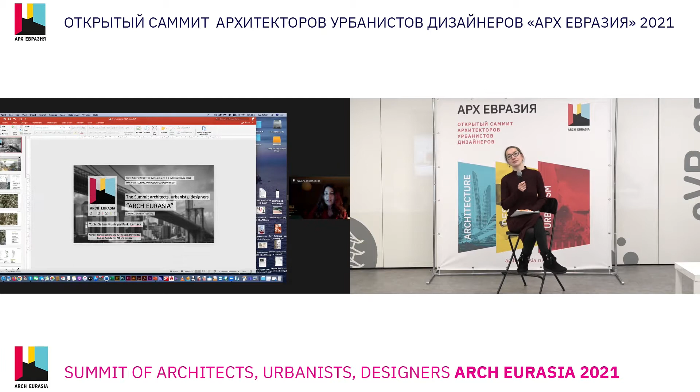Yes, we are from Athens. My name is Panita Karamanea, Thanasis Polyzoidis. We are architects and landscape architects, and our group is called Topio Efta. It's called Landscape 7 in Greek. We want to present a project of ours that won an award in an architectural competition in Cyprus.

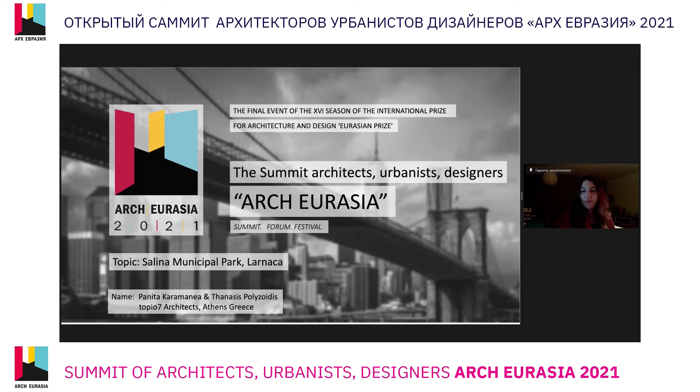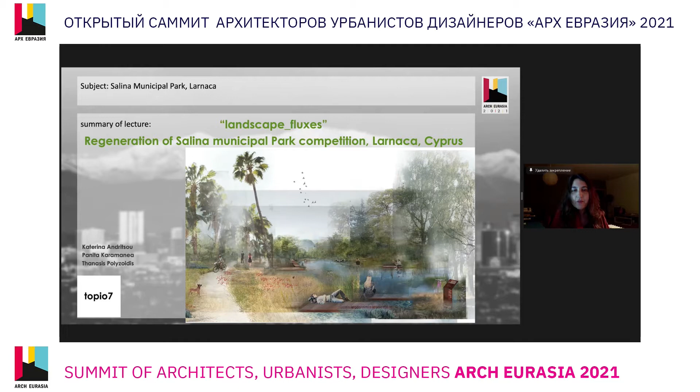That's called the Salina Municipal Park. The project is called Landscape Fluxes. It's a regeneration of Salina Municipal Park, a competition in Larnaca, Cyprus.

Here we want to first present a little bit the topic and the site. It's Larnaca, a city in Cyprus. You see with the red rectangular the place where the park is. The general layout of the center of the city is a typical Mediterranean city, very dense, with not a lot of public spaces and not a lot of greenery. The municipal park is right in the middle of the center, crossed by central roads and avenues.

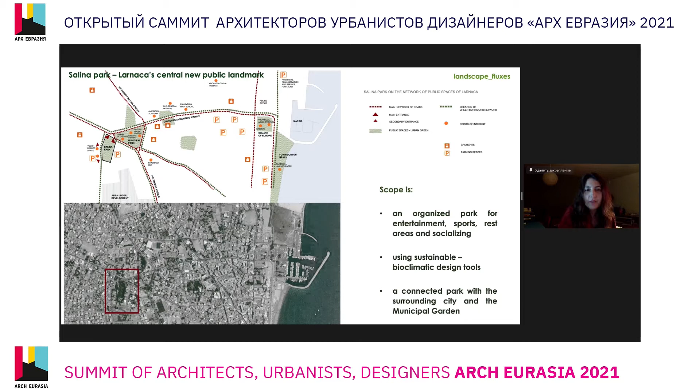It's nearby a centrality that has the municipal library, another park, and is pretty close to the waterfront. So the scope of the competition was to design an organized park for entertainment, sports, rest areas, and socializing, using sustainable bioclimatic design tools, and create at the end a connected park with the surrounding city and the municipal garden, which is right next to it.

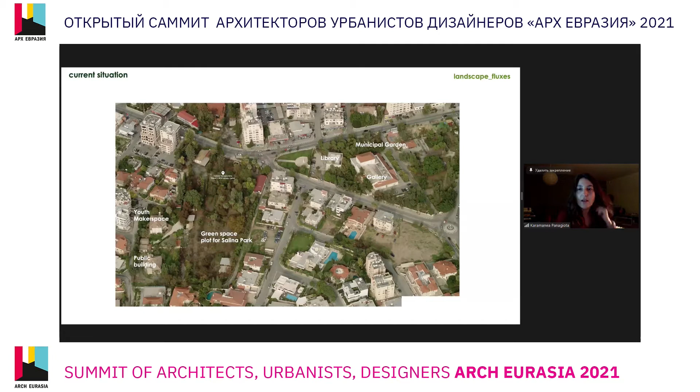Here we have some aerial photos that show how the nearby neighborhood is, and this urban void, let's say, with a lot of greenery inside, but it is a rather neglected and disconnected area for the city. It's not very usually being used, people don't frequent there, so it's a pity and a lost value, and it's a challenge to try to incorporate it into the urban net.

And offer a great public space with greenery and various uses for the citizens. So the main objectives of our project were to create a pole of attraction for local and supra-local uses in the framework of a holistic landscape eco-strategy in order to achieve an open and accessible public space with social dimension.

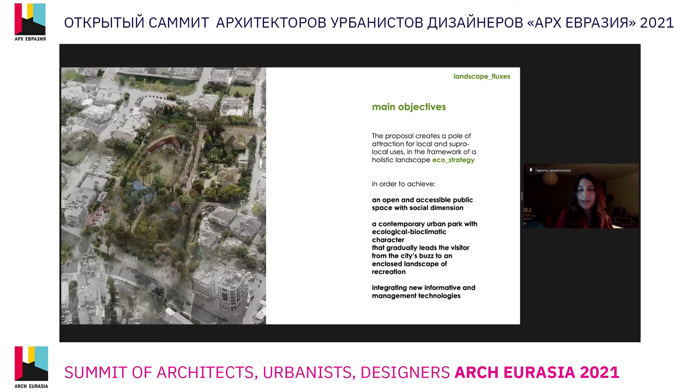A contemporary urban park with an ecological bioclimatic character that gradually leads the visitor from the city's buzz to an enclosed landscape of recreation, to an introverted internal greenery core, integrating at the same time new informative and management technologies in order to have a smart park as well.

So the main idea is to create an area of mutual osmosis with the city fabric, a well-organized area of urban nature between the park and the city, a field of landscape fluxes that will form a dynamic new landscape of a permeable green buffer zone that leads to an inner introverted clearing of greenery, of urbanity.

Where you can experience the periodicity of nature and a series of urban uses.

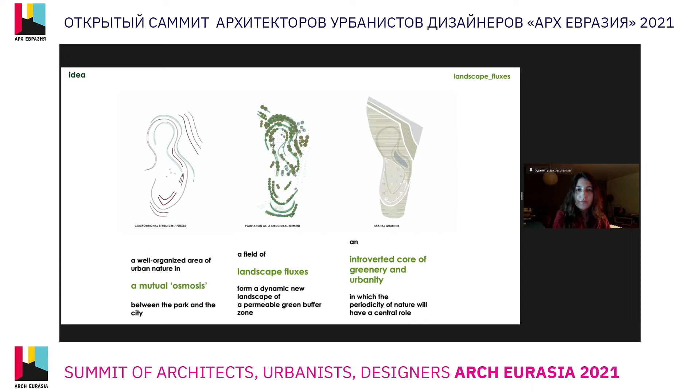It's very important to re-establish and reconnect this part of the city with the rest of the urban net. So accessibility and connectivity play a very central role in the project. Plantation and vegetation as structural elements are also very important, along with the various and different atmospheres and spatial identities that are being introduced, which we'll explain in the next slide.

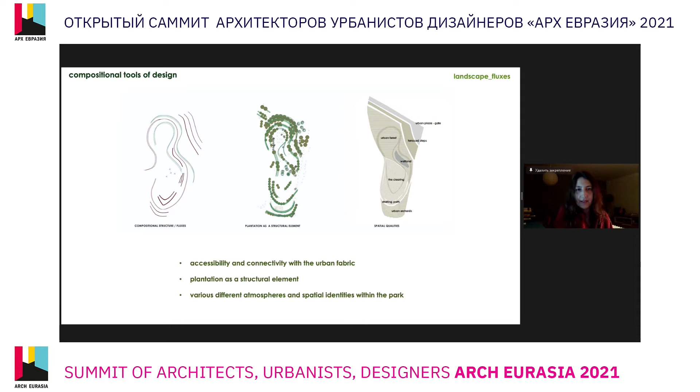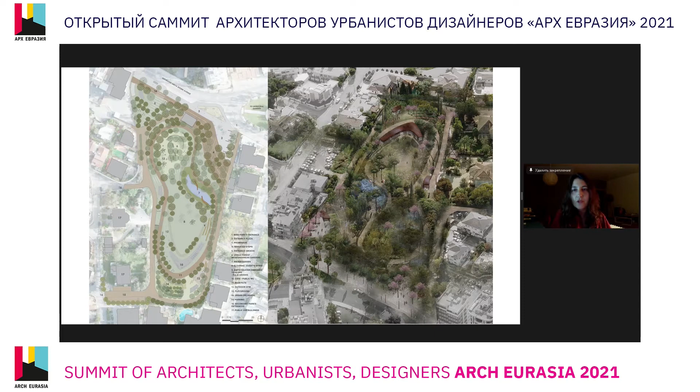Where you find some constructions: a cafe, a restaurant, a small pond, a small amphitheater, a clearing for various events. All these are interconnected with a network of movement and paths for the visitor, for the one that wants to jog or do various sports in the open air atmosphere.

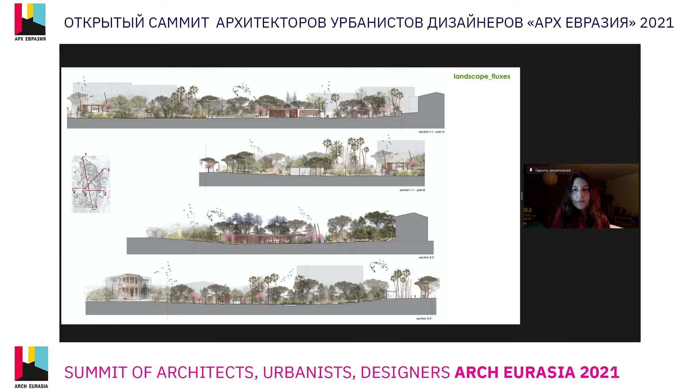And of course, all these different aspects and urban and spatial qualities are also seen in this succession of sections that create a narrative of space. So now maybe Thanasis can explain us better.

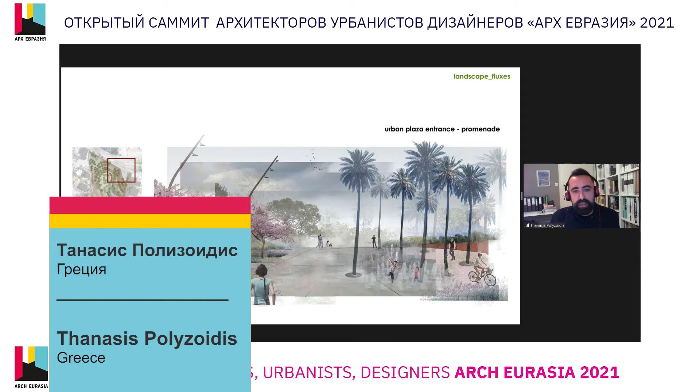Yes, and now we will shortly describe a little more every part of the park and the design strategies. The visitor enters the park from the city, from the urban fabric, through the urban plaza, that is located along the main avenue at the highest part of the site, providing panoramic views to the entire park, functioning as an urban balcony.

It is made of concrete paving.